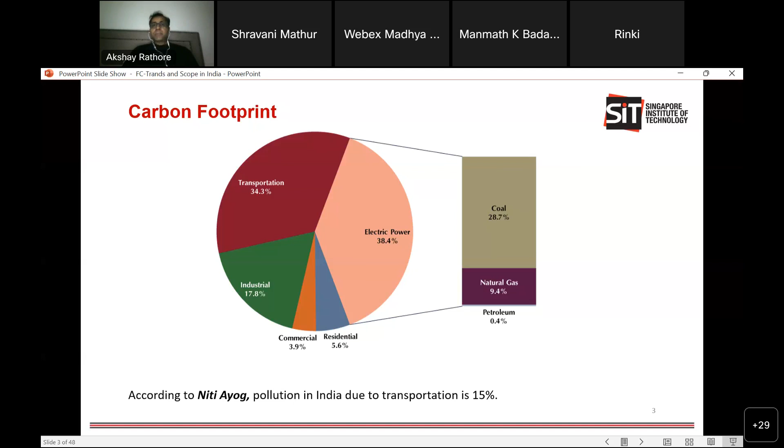transportation. According to Niti Aayog last year, pollution in India due to transportation is around 15%, which is quite optimistic; it is very close to 20 or even 20 plus, because the majority of our vehicles are gasoline vehicles. In the current scenario, the total number of registered vehicles in the world is 1.4 billion, and India's share is 300 million, quite a lot, 30 crores. Right now the number of electric vehicles in India is close to 2 crores, approximately 7%. 93% are still gasoline based.

Now electric transportation is happening. Governments are trying to stop registering gasoline vehicles after 2030, or from 2040 scrap all diesel and petroleum vehicles so it will be only electric. But things are moving slowly because standards, infrastructure, and policies have to come for many things. Electrification is possible in two ways: either battery based electric mobility or hydrogen fuel cell based electric mobility. Both are electric vehicles, only the source is different.

Generally electric vehicles have three major components in the propulsion or traction system: the source, which is the battery, then the inverter converting DC into AC, and then the induction motor. Similarly, in a hydrogen fuel cell vehicle, the fuel cell converts hydrogen into DC, then the inverter converts DC to three-phase AC, and then the motor. The only difference is the source. For both cases there are different challenges. With batteries, one of the major challenges is charging infrastructure and fast recharging.

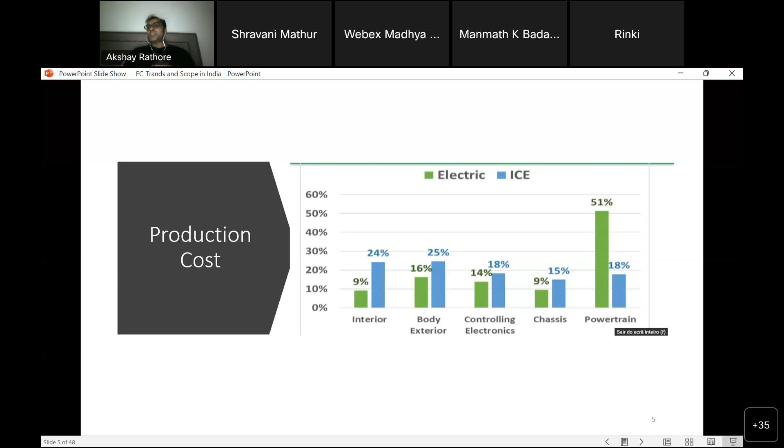Suppose you are developing a Bluetooth entertainment system inside the car, manufacturing tires, steering, transmissions, chassis, motor, everything, and you are manufacturing batteries. Manufacturing batteries is very energy intensive. That is the reason they are expensive, because battery making itself costs a lot, and that's why battery manufacturing is very difficult.

The range is limited, density is also not as expected, weight is quite high, cost is high, and there are environmental issues. The governments of almost all countries, including India, are still not able to prepare standards for recycling or disposal. Even in Singapore, I was talking to the local agencies, the Energy Market Authority, Land Transport Authority, asking what the policy is. They say they don't know yet. Then what happens when the battery life is over? They have disposal issues.

If you see the last point, I hope you are aware of it, and that is the most critical point: making lithium-ion batteries emits 74% more carbon dioxide than the conventional car. So this statement says that manufacturing an electric vehicle introduces 74% extra carbon, let us say twice. Manufacturing an electric vehicle produces two times more carbon than manufacturing a conventional gasoline vehicle. So right here the comparison starts.

The majority of people ignore the fact that an electric vehicle is not a clean vehicle from day one, because its manufacturing has produced basically double the carbon. First of all, you have to compensate for that, and that takes time.

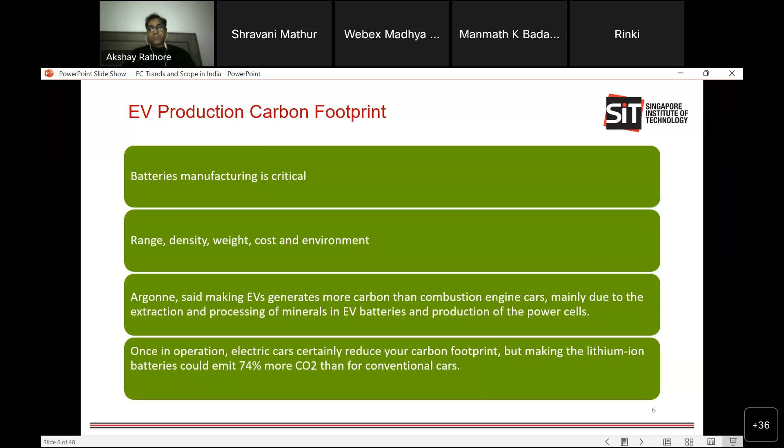This is research done by Argonne National Laboratory in the USA. It says that since in the United States 23% of electricity generation comes from coal-fired plants and the rest is cleaner energy, if you drive the vehicle 22,000 kilometers, you reach the carbon neutral point, approximately 2 years at 10,000 kilometers per year. In Norway, more than 90% is hydro and renewable, so within a year Norwegians can say they are driving a clean vehicle.

When it comes to India, China, and Poland, it is 127,000 kilometers, meaning after 10 or 12 years. Now, if after 10 or 12 years your battery is gone and you need to replace it, then this cycle starts again. So this is a cumulative process to come to the carbon neutral point.

So in India, China, Poland, or similar countries, carbon neutral or clean mobility will arrive when coal generation drops from 76% to less than 25%, meaning a 50% reduction of coal-based generation. And the government says this is a mission of the next 50 years, 2070 and beyond. I will show you one slide; you will be surprised to see that also.

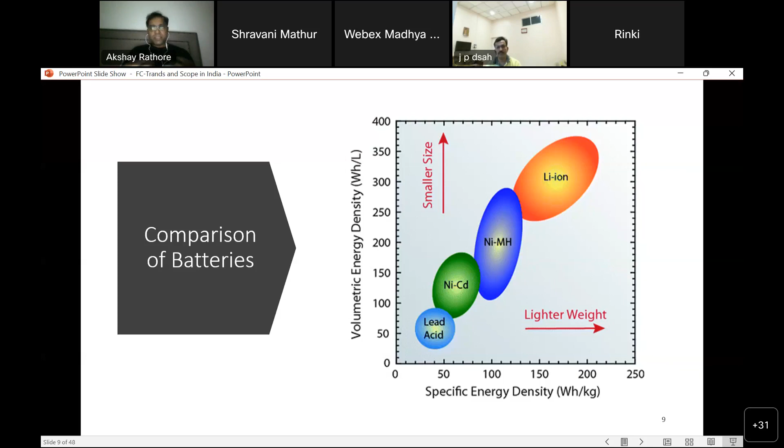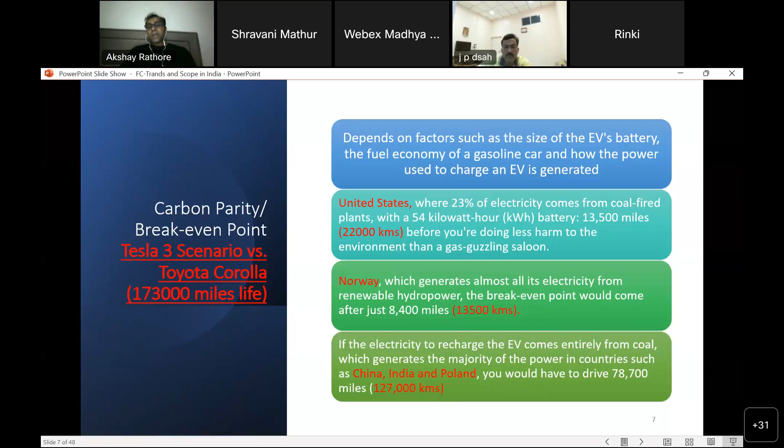Now some facts about batteries, including our mobile batteries. As I was saying, after 127,000 kilometers, if you need to replace your battery, that cycle starts again. And why may you need to change your battery after 10 years? One reason can be that not everybody is an engineer; not everybody understands all the facts.

Nobody is reading the data sheets and manuals. People just want to drive. They see that the petrol tank is coming to the red zone, or the CNG gas is going down, and then, since they cannot go much further, they fill the tank. If you do the same thing with the battery, that is not good for the health of the battery.

If you discharge your battery quite close, suppose after 85%, when only 15% is left, you can see in the mobile battery you get the red signal. So you can see 85% or 100% is not much difference.

So a battery will have some number of cycles, say 1000. But if you charge your battery after 30-40% of discharge, the number of cycles becomes 4 times. If you discharge your battery 50%, only half, the life cycle is 3 times higher, or more than 3 times when it is 40%.

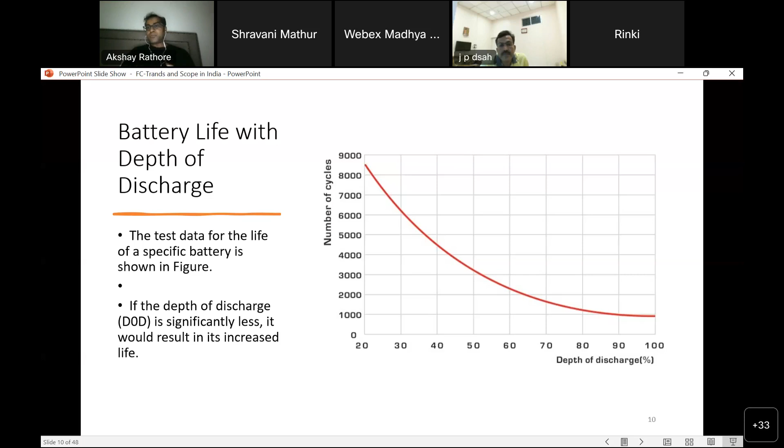So depth of discharge becomes quite important, which not everybody takes into account, and because of that you need to replace your battery quite often. For countries like Singapore, Thailand, even South India, batteries are good in a warm climate. When the climate is cold, there are two issues. One issue is called leakage.

One issue is called leakage. What happens is that when you go from high temperature to low temperature, the battery loses charge. In Western countries, London, Montreal, New York, people don't park the vehicle outside because in the morning they are not able to start the car. Two reasons: either the battery lost charge because of the low temperature, or the electrolyte has frozen inside.

So it depends upon the battery charge and discharge. If the battery is fully charged, it can withstand -58 degrees. But suppose somebody came back after driving, put the car outside and slept, and the battery is only 20% charged, then at -15 degrees centigrade the electrolyte, the acid inside, will freeze, and then there is no chemical reaction and you are not able to start the car.

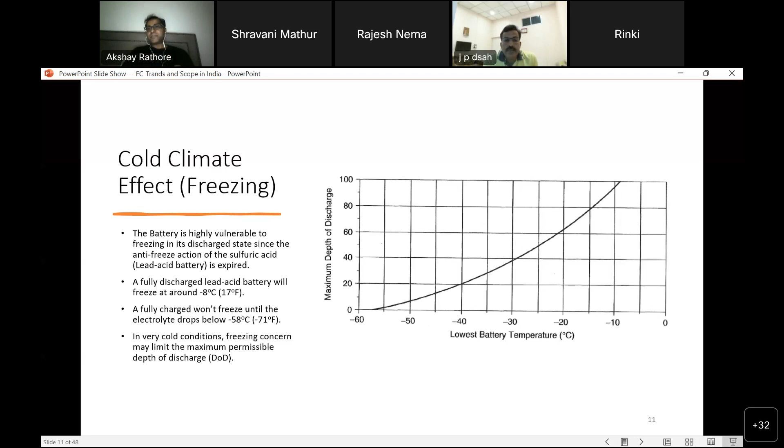So this issue of leakage can be troublesome in winter, because if you started driving and you meet traffic, and the same thing can happen in Kashmir, the Himalayas and Uttarakhand, and the temperature outside is very low.

Okay, there is some noise coming actually, if somebody can mute.

So if they are in traffic, due to low temperature outside, the battery will start losing charge slowly. If you are driving very slowly, after some time the battery charge is over if you are not fully charged. Then it will close one lane, and the same situation can come to other vehicles also. If they get stuck in traffic, they lose charge, and they will call some towing agency to take the vehicle away. So this is a serious challenge in winter for electric vehicles.

Now coming back to my previous point, we have coal-based generation of more than 75%, and according to the Ministry of Coal, compared to 2021, in 2022 coal-based generation increased by 3.12%. So despite all renewables, solar, wind, floating solar, they still had to increase coal-based generation, probably because of increasing energy demand due to rising living standards, or due to 7% electric vehicles, e-rickshaws and all.

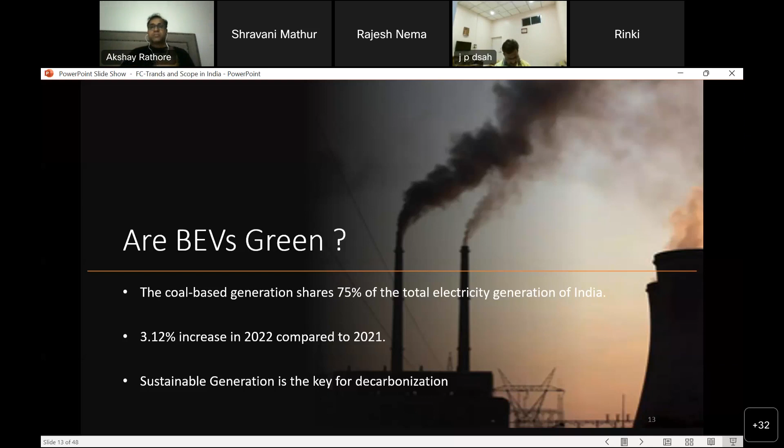Okay, now I'm just moving to fuel cell vehicles, hydrogen based. It offers all the benefits. Zero emission, of course, only water droplets. One major point is no dependency on foreign purchased gasoline if it is a conventional vehicle, or lithium ion if it is an electric vehicle. No need of charging infrastructure at all. Just like the way we have a CNG gas station, we will just have a hydrogen station for quick refueling. But everybody needs to go out because hydrogen is explosive.

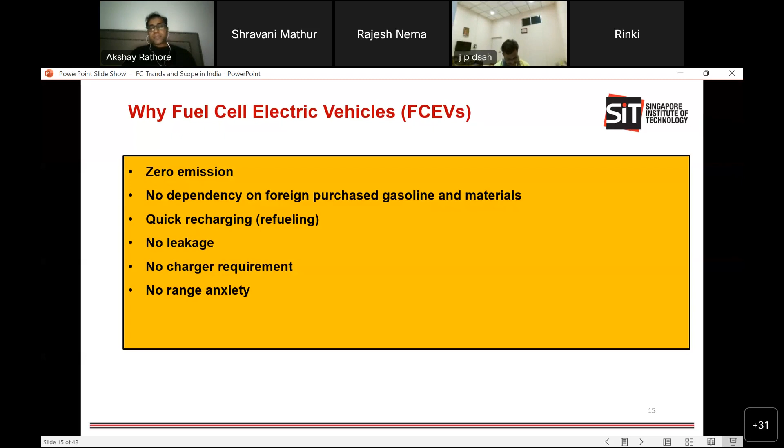There's no leakage like battery, whether it's winter, summer, anything, it stays the same. No charger or onboard charger requirement. No range anxiety, you can go 600 kilometers right away on one refueling of the tank. The major challenges are like the way we had battery charging infrastructure with distribution transformers, different cabling, fast chargers - similarly we need to develop hydrogen generation infrastructure and supply it to the fueling pumps.

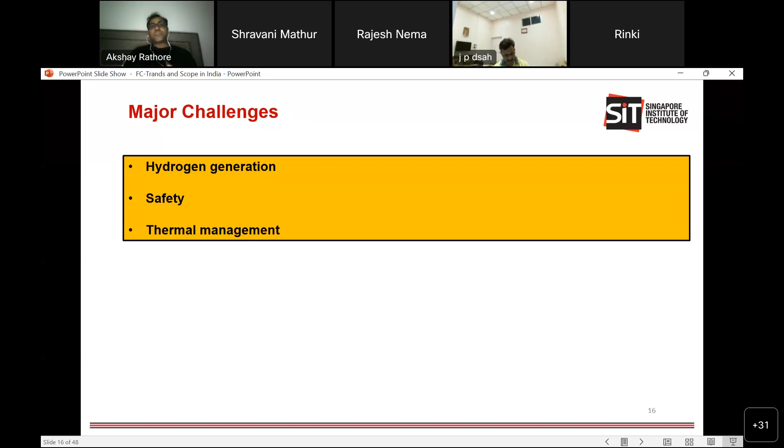Safety is an issue because the gas is explosive, and fuel cell reaction is basically exothermic. Generation of electricity from fuel cell or hydrogen is an exothermic reaction, it produces very high grade heat. And in India it's already basically high heat, so because of that the car can get overheated. So somehow thermal management is an issue, you have to basically expel the air. In case of aircraft or marine applications this is good, because the heat generated can be used for space heating or water heating, but for cars it's a different situation.

So if we see the fuel cell history, it's quite old, 180 years old actually, where the fuel cell was generated and the name given was the gas voltaic battery. Voltaic because the output is volt, gas because it is from hydrogen gas, and battery because battery was popular to produce output voltage, basically DC voltage.

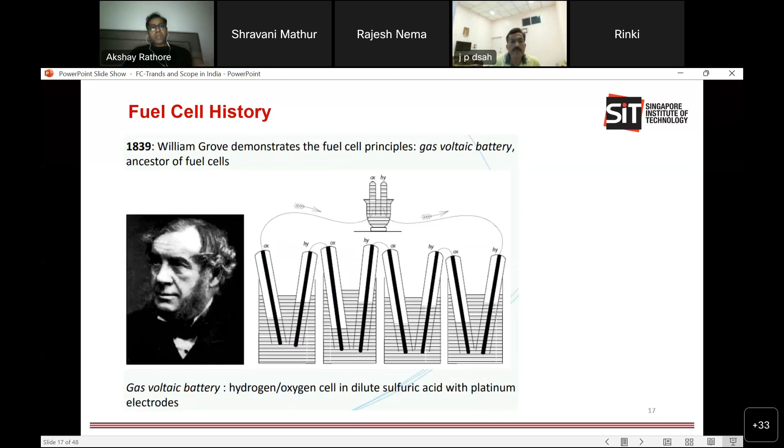But after 60 years, in 1895, people in America were successful in developing a 1.5 kilowatt fuel cell. So you can see it took 60 years to develop a 1.5 kilowatt fuel cell, and after that another 35 years to develop a 2.3 kilowatt fuel cell. Here you can see this 2.3 kilowatt fuel cell, and you can see the height of this fuel cell is probably more than 5 feet, so very large volume. So 2.3 kilowatts, but very large.

So in our suppose car, we need basically 10 kVA. So you need to put 5 of these. But there is no space to put such 5 fuel cells in the car. The volume of these 5 fuel cells itself is basically similar to a car.

But it was developed, and in 1950 NASA basically deployed them and sent them for space missions, Apollo lunar mission and Gemini space mission, ensuring that fuel cells are quite safe - quite safe in 1930 and 1950, 70 years from now, 90 years from now. So fuel cell technology at that time also became quite mature, almost a century ago. But the major challenge was basically this volume and the weight and all, that you cannot fit inside the car, inside the buses also. But okay, we'll see later.

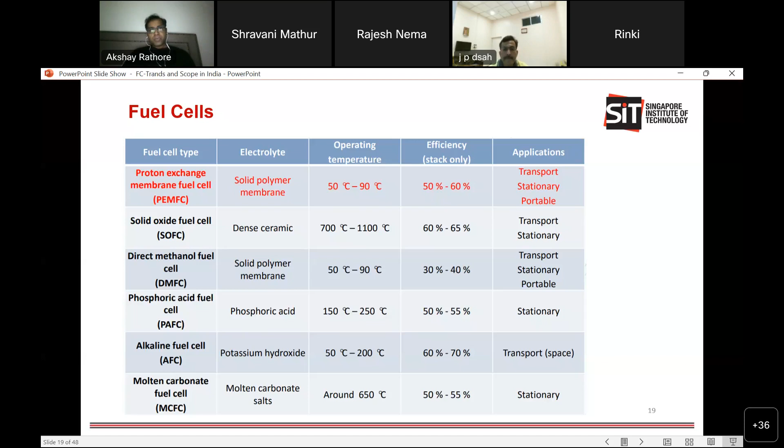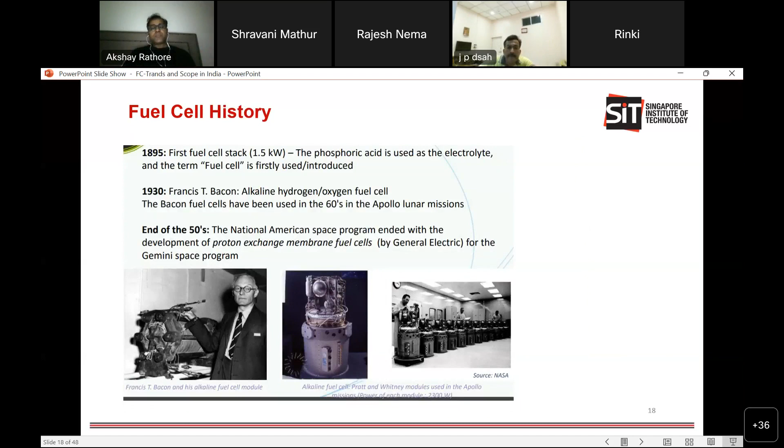After 1950, the technology was not mature enough, because the fuel cells were quite big and quite heavy, so they could not be used for electric cars and electric buses. But after 40 years, they were successful in developing very compact and lightweight fuel cells. So here you can see 250 kilowatt fuel cells running a fuel cell bus.

Mercedes-Benz, and similarly you can see eBay. eBay is basically the bidding company, it sells products like Flipkart and Amazon or Alibaba, etc. But in eBay you can bid. When a product is there, a price is written, and you can bid that you want to buy at this price. Generally for backup power systems, we use UPS or batteries.

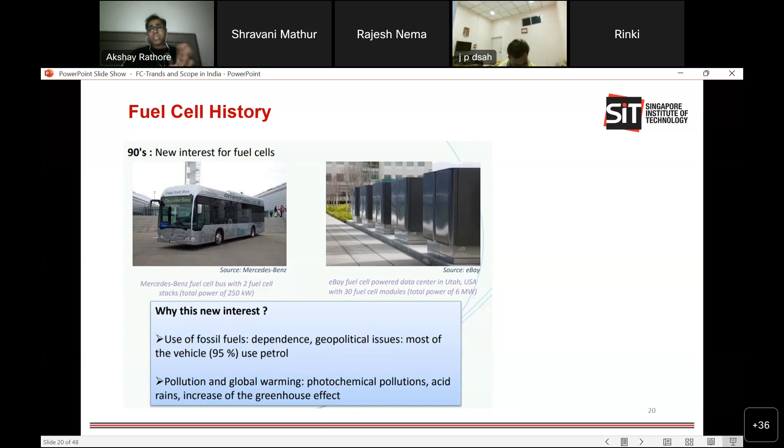In the 90s, eBay used fuel cells of 6 megawatt capacity, quite large. So 30 years from now, the fuel cell technology was quite matured in terms of high power scaling, megawatt level, and quite compact, safe and lightweight, either for stationary backup power generation or for mobility applications.

After the US, it spread to Europe, which is 12 years from now, 2010. We are in 2023 now. So in Italy, Switzerland, Germany, London which is UK, Oslo, Norway, almost the majority of the European Union used hydrogen buses for their local transportation.

In Canada in 2008, when the Olympics or Commonwealth Games were there in Vancouver, British Columbia, they used hydrogen fuel cell buses for picking up and dropping off the players and coaches from the hotel to the playground and back, 14 years from now. Canada also tested it.

Now if we talk about UK, we were talking about 2010. Now if we talk about 2021, which is 1.5 years before, London local transportation has been fully on hydrogen buses. If you do a Google search or open BBC or other websites, London is using around 25 buses. You can see this is a single bus, and behind is the double decker bus.

The London local transportation has been fully hydrogen based now, and the bus starts at 6 o'clock and goes back to garage at 1 a.m. in the night, meaning 19 hours of running without refueling. Just think, battery based buses cannot do that, you need 3-4 times charging. But this is 19 hours without refueling, 6 o'clock to 1 a.m. This was just 1.5 years before.

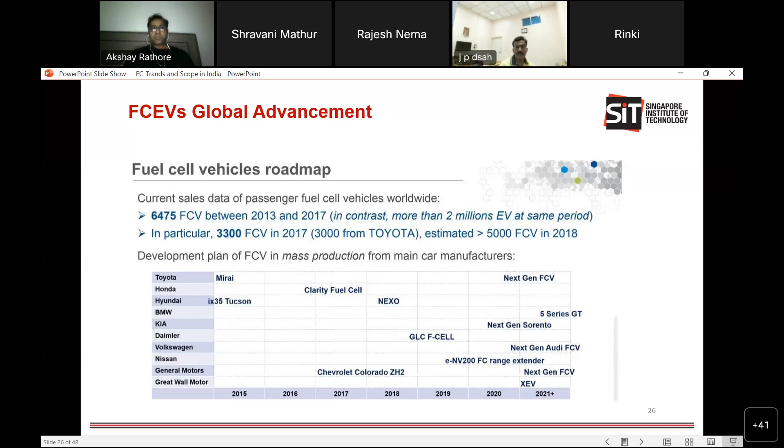But now you see in 2021 and later, all the manufacturers are basically focusing on hydrogen vehicles, whether selling or not. At least they are testing, showing they have the capability to develop, test, and basically sell also in future whenever sales increase. And quite a few they have sold already.

Now when we were talking about scope for trains and aircrafts, you see in Germany already, from 7 years back, from 2016, there's a train called Coradia iLint developed by Alstom. Right now, all the contracts about hydrogen vehicles, whether trains in Germany or even in UK or even in India, I will show you one slide.

All the contracts are going to Alstom. Alstom is having lots of business nowadays because of hydrogen. So in 2016, Germany basically had a hydrogen based electric train fully on hydrogen, 7 years back.

In Scotland, after 2035, all the train network of Scotland will be basically on hydrogen. Again the same, Alstom Coradia iLint, they have given the contract.

This is news from last year, August. In 2016, one train started, and now you can see another 14 trains started in Germany, hydrogen powered. So now Germany has basically 15 hydrogen based trains, and another 27 to start in near future, Coradia iLint. Germany is also moving towards a full hydrogen-based electric train network.

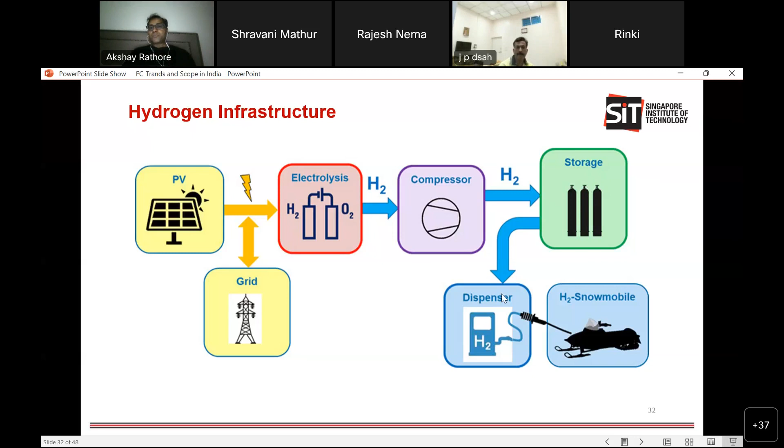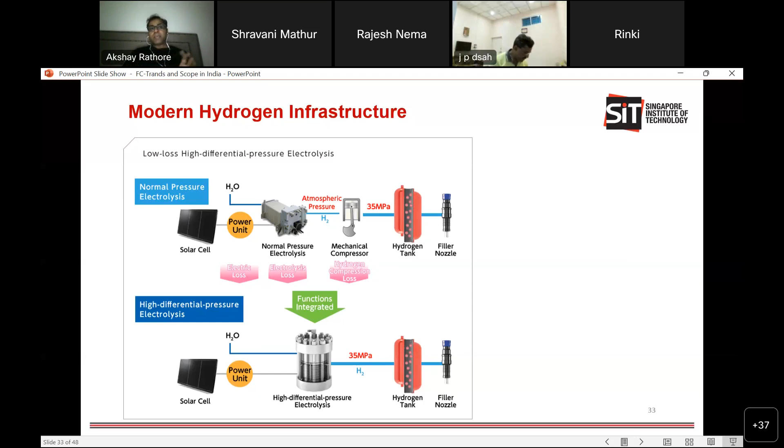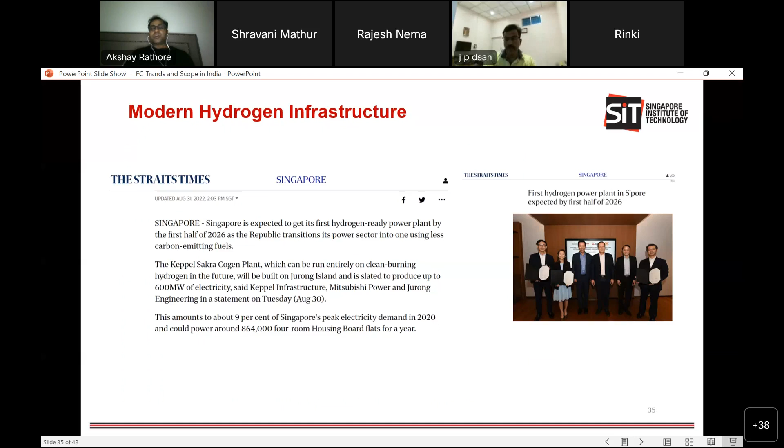Singapore also said that by 2026 they will have 600 megawatt capacity of hydrogen infrastructure on Jurong Island. Another news is about to come, that on another island of Singapore known as Semakau, they will have, if not 600 megawatt, 100 or 200 megawatt of hydrogen station. So Singapore is also moving towards hydrogen generation.

Just the first week of January, Prime Minister Modi also announced that India is going to be a global hub for hydrogen, and 20,000 crores of investment has been sanctioned to make India a global hydrogen hub. So India is also moving in that direction. As I was saying, this is the mission: by 2050 the majority of countries have to cut their carbon emissions by 80%.

Okay, and that is the reason that generation as well as mobility is moving towards electric, decarbonized, because by moving generation to renewable and moving mobility to electric or clean mobility, this 80% cut is possible.

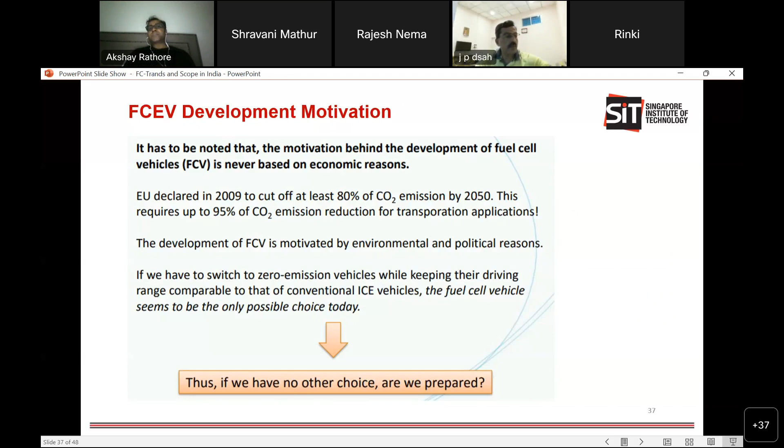Compared to the battery-based electric vehicle, the fuel cell electric vehicle has similar components: power conditioning unit, which is the inverter, electric motor, induction motor, synchronous motor, controller, energy management, EMS or battery management system. But there is extra thermal management because of the exothermic reaction. The fuel cell uses a hydrogen tank instead of a battery, but still a low capacity battery is required.

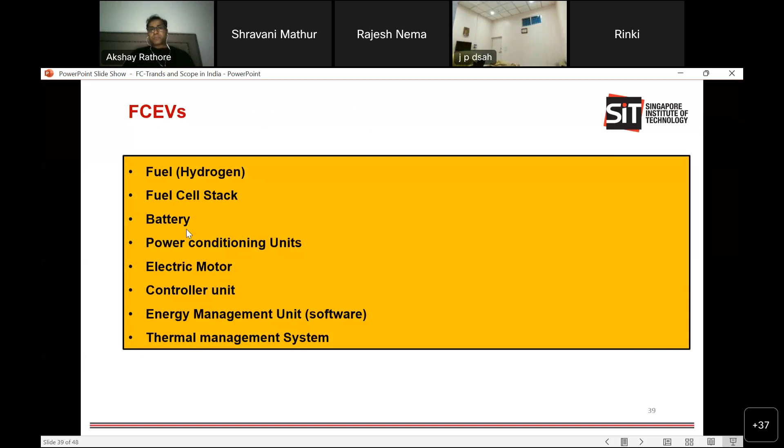Why is a low capacity battery required? Because fuel cell response time is quite high. When you want to start the vehicle, starting the fuel cell is not an easy process. It takes time, a few seconds, even 1 minute. So when you start the vehicle, it starts from the battery. Probably the first kilometer is on the battery, and after that the fuel cell takes over. In normal or steady state driving, the fuel cell is supplying the traction power or propulsion power.

And when you want to accelerate, the fuel cell will not be able to supply the power instantly, because the fuel cell time constant is large. A mechanical process is involved to adjust the valve opening, the throttling of the valve, as well as the electrochemical reactions that decompose hydrogen into 2H+ and 2e- electrons. That takes time to come to equilibrium. So during that time the power is supplied by the battery, and once the electrochemical reaction is at equilibrium and the valve opening has been adjusted, the battery will be idle and the fuel cell will take over. So for start and acceleration, the battery is required for a few seconds or 1 minute.

Similarly, during deceleration or braking, during regeneration the motor acts as a generator and the battery will be charged. The fuel cell is not reversible; it is unidirectional. So the power captured during regeneration will go and charge the battery, and then the battery can be used again for acceleration and for starting. So the battery is necessary.

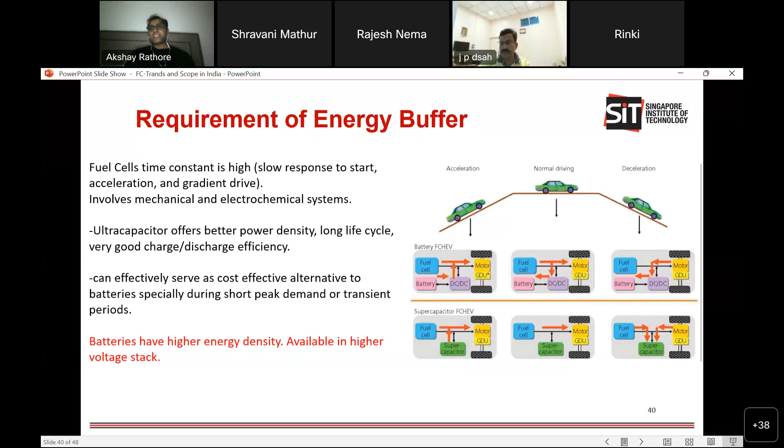Where it is not preferred, for example because fuel cell response time is quite slow and hydrogen production is not that mature yet, instead of propulsion power the fuel cell can still be used in vehicles, electric ships, or more electric aircraft as an auxiliary power unit. You can supply the hotel load: the lighting, cooling, air conditioning, entertainment system, displays, mic addressing system, fully on the fuel cell auxiliary power unit. The propulsion with the heavy load can go on the batteries, and the other load, known as hotel load, can be on the fuel cell.

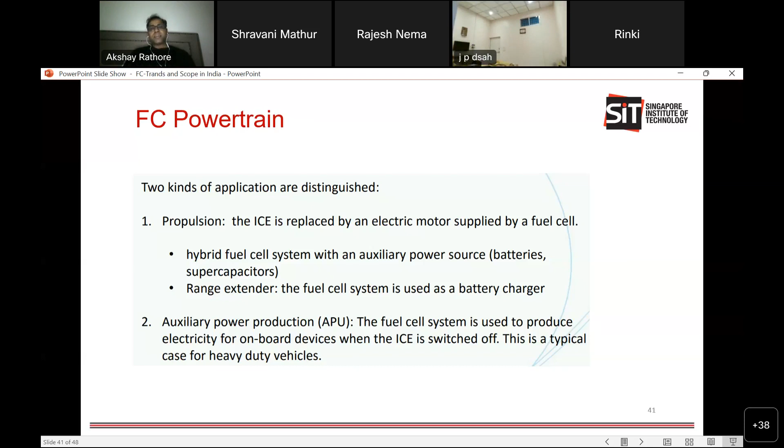So fuel cells are also popular, if we see the earlier literature, for auxiliary power units, because earlier fuel cells were quite big. As I was showing you, 5 feet, and the volume was quite large, so they were used for auxiliary power units. Now because of their compactness and light weight, they are being used for the propulsion system also, but still there is an option.

So now, how to design the power electronics, or what kind of power electronics? It depends upon the fuel cell characteristic. You cannot replace the battery by the fuel cell keeping the same inverter. The inverter that you are using for a battery-based electric vehicle cannot be used for a fuel cell vehicle. Here is the reason. One reason is that fuel cell voltage changes a lot. Battery voltage changes only 12-13%. If you are using a 400 volt battery, the minimum voltage is around 350 when the battery discharges over time. If it is a 450 volt battery, it can come down to 390.

So when the vehicle is at higher speed, the rated speed, say 100 kilometers per hour, the fuel cell voltage is say 400 volt, drawing say 10 kilowatt power. And when you are driving in traffic and the speed is only 40 or 50, which is the regular speed in city driving, not on the interstate highway, then the fuel cell voltage is around 650 or 700 volt.

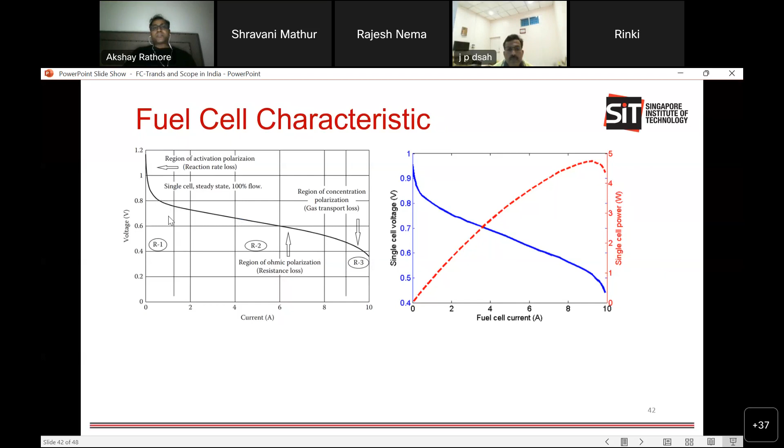If you are driving at high speed on highways, fuel cell voltage is 400 volt. When you are driving inside the city, fuel cell voltage is 700 volt. If you got stuck in traffic, then it is 800 volt. So fuel cell voltage has a large variation, so you cannot use the battery inverter. The devices will be damaged. You need to prepare an inverter that can handle the voltage variation from 400 to 800 volt. So we have to design power electronics that can handle this voltage variation. And another issue is hydrogen utilization. Let us see the next slide.

Each current level, which is basically the speed of the vehicle, corresponds to a particular hydrogen flow. For example, 10 ampere on highway corresponds to 100% of the flow, meaning the throttle valve is fully open. When you are doing city driving at 40-50 km per hour, the hydrogen fuel flow should be 50. But suppose your mechanical valve is defective, and at 40-50 speed it is not able to adjust to 50, but it is 75 rather than 50. Still there is 25% hydrogen wastage. Then instead of 600 kilometers of driving, you will be able to drive only 400 kilometers.

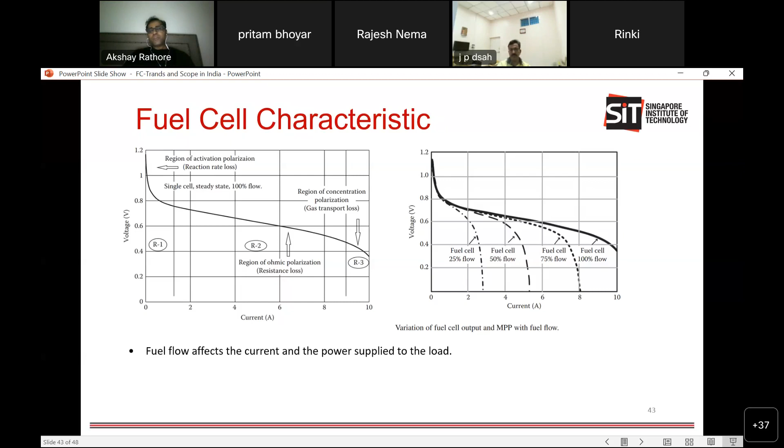So each speed, or each current of the inverter, has one hydrogen flow point. The mechanical valve should be able to adjust to that value. If not, this is called waste of hydrogen, or low hydrogen utilization. So the way we have a maximum power point in solar, we have an optimal power point corresponding to the hydrogen flow.

It is the reverse. In the earlier case, based on the solar intensity, you define the current or power. But here it is different. Based on the current, you decide how much hydrogen flow should be there, in the reverse direction, but it is still a maximum power point. So based on that, the controller should be able to give a command to the mechanical system to adjust this hydrogen flow.

Okay, yeah. Sorry, what happened?

What happened? This. Okay. Yeah.

Sorry. So number one is this voltage variation, and number two is basically the hydrogen adjustment. You can see from the next slide what happens if this hydrogen adjustment is not okay. That's the third point that I will explain, and it will explain the first one also. The power electronics or the inverter should draw a stiff DC current from the fuel cell. Because if the current drawn from the fuel cell has a ripple, then the hydrogen flow adjustment corresponds to the peak value.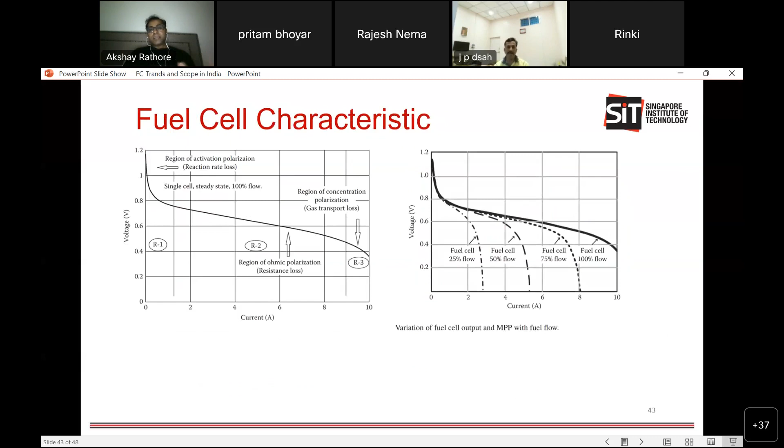So we need power electronics that can handle this large variation with the speed, that can manage the optimal power point, and that can maintain a stiff DC current. These three are the major requirements. You cannot use a battery-based inverter for fuel cell vehicles. Another one is the transient operation: the power electronic inverter should be able to switch between the battery and the fuel cell. In steady state, the fuel cell. In transient condition or regenerative braking, the battery.

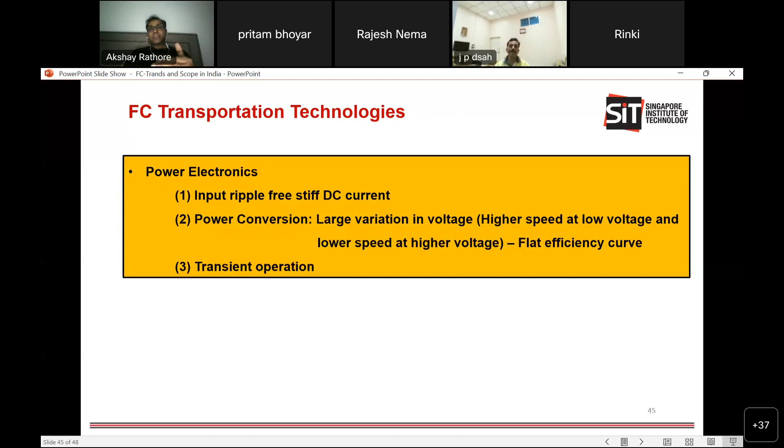So generally there are two kinds of power electronics. We are coming to the end now, probably the next two slides. One is voltage fed, one is current fed. Current fed power electronics is my research area. I got my IEEE fellow because of this. The majority of my publications are on current fed converters, very novel papers. Out of 300, probably 200 are on current fed systems.

It has an inductor in series with the source, and the inductor develops a stiff DC current, because an inductor is basically a current source. So here is the stiff DC current, and right away the first problem of ripple-free current is solved. Another is that the adjustment of hydrogen should correspond to the input current, or the speed. This input current will right away give the command that it should be 50% or 80%. If there is a ripple, that command is changing. So those two problems are solved right away.

Another is the large variation in voltage and current. I have written a paper comparing voltage fed resonant converters, voltage fed PWM converters, voltage fed bidirectional dual active bridge converters, and voltage fed converters with inductive filter and with capacitive filter, against the current fed converter. The judgment is that with a large variation in voltage, the current fed converter gives a relatively flat efficiency curve, while voltage fed converter efficiency drops down. After that my citations have gone to more than 6,000 now.